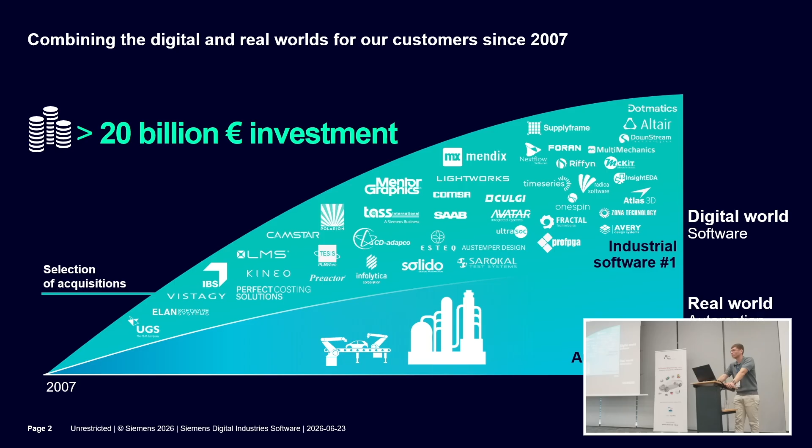This has been done through the Simcenter simulation portfolio, which enables us to transform engineering. We are as comprehensive as we can be, meaning we can access many different scenarios of multi-physics simulation and analysis, and the portfolio applies to all phases of product development.

We are as intelligent as we can be, meaning we are integrating AI into the simulation world. As Paschalis mentioned about AI agents and AI workflows, we're streamlining and automating complex workflows with the help of AI, scaling and evolving our resources, and integrating simulation and tests into the digital thread.

Here you can get a taste of where Altair's portfolio fits into the Simcenter portfolio after the integration, the acquisition, of course. These are the key areas we're going to talk about today, covering different multi-physics and different domain simulations.

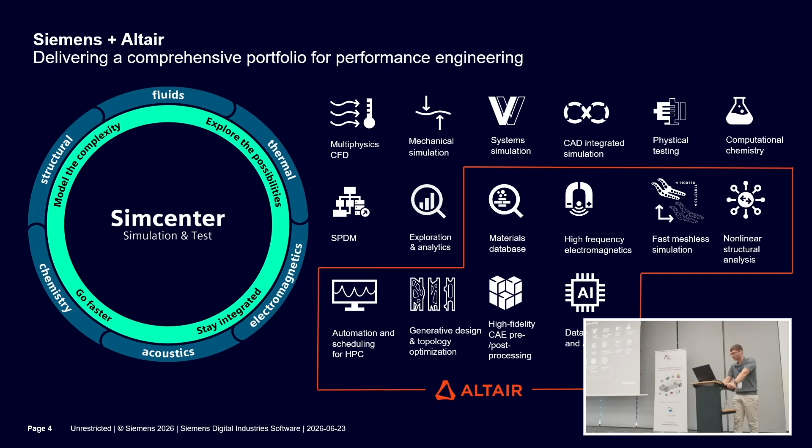Let's start with the simulation, modeling, and visualization software family. When we talk about simulation and visualization, we mean pre-processing our models, importing our CAD, pre-processing, setting up, creating the mesh, setting up our solvers, and afterward, once the solver has run, visualizing our results.

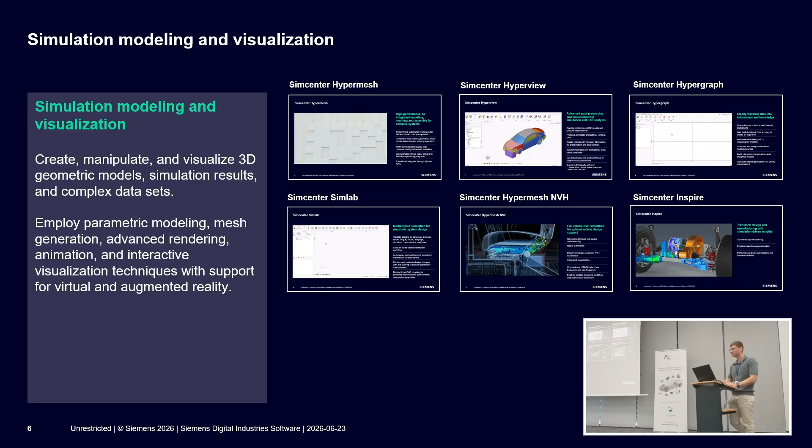Let's see the flagship of Altair, Simcenter HyperMesh. Let me ask a quick question - how many of you know HyperMesh? Can you please raise your hand? Okay. And how many of you have used HyperMesh? Okay, that's nice, thank you.

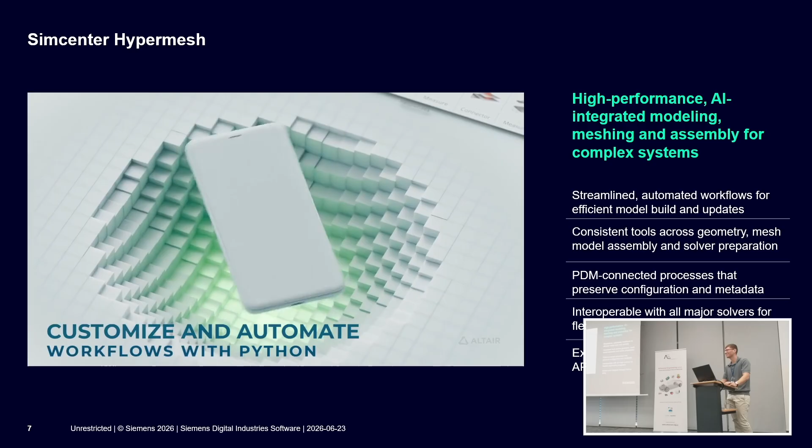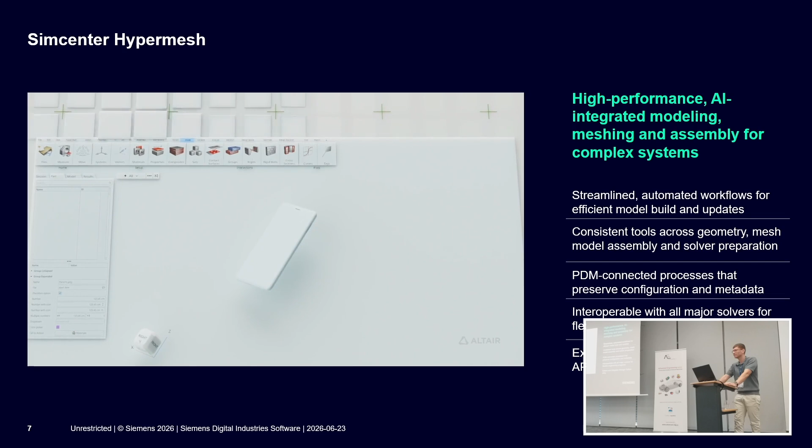Simcenter HyperMesh has been the flagship of Altair, and now Siemens, for more than 30 years. It's the go-to tool when it comes to pre-processing our structural analysis.

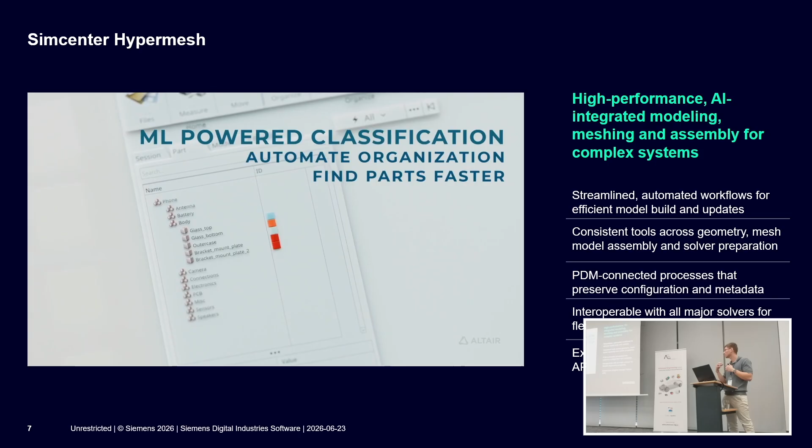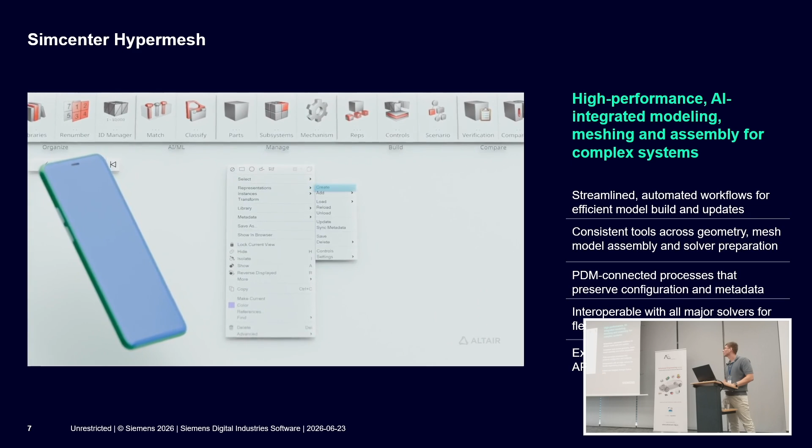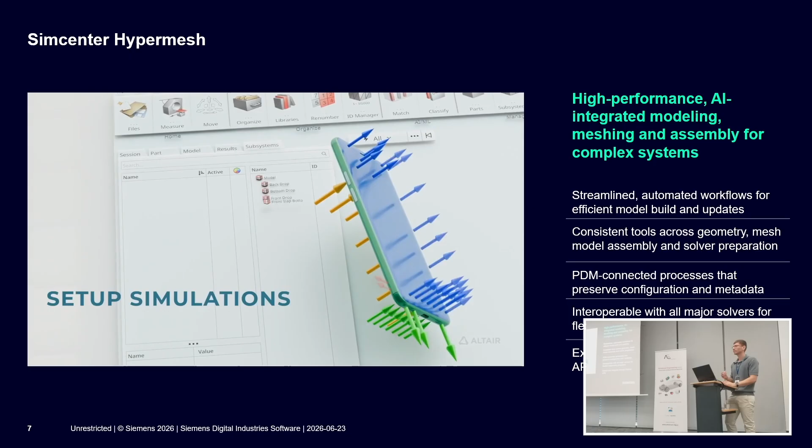It has great capabilities when it comes to importing our CAD. There are PDM-connected workflows that enable us to get metadata information and transform and utilize it in our engineering workflows. There are consistent tools across geometry modification, simplification, and mesh creation. HyperMesh can import different kinds of CAD formats, and within it we can set up our analysis for different solvers, like Abaqus, Nastran, and so on.

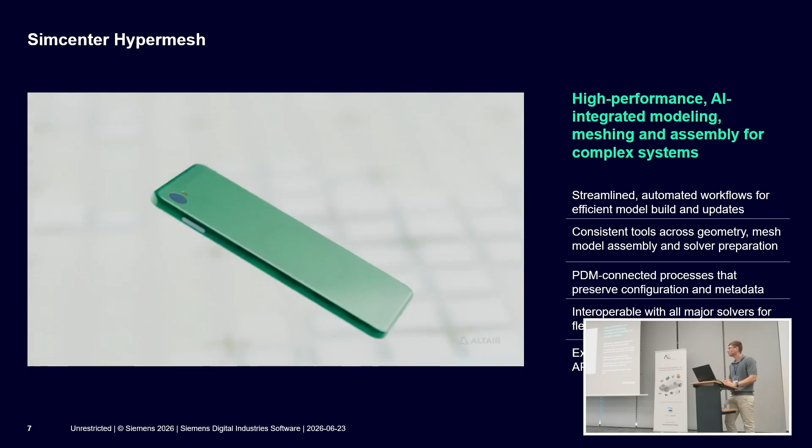So Simcenter HyperMesh is interoperable, and it has great capabilities when it comes to programming. It is open and can work through Python APIs that help us automate our workflows.

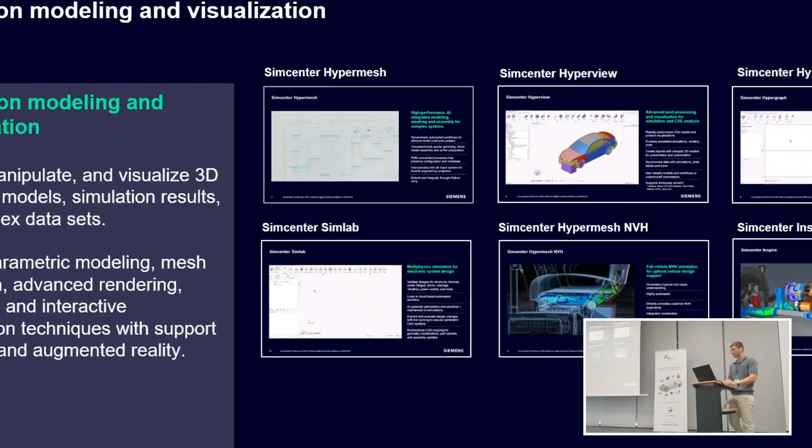Now moving on to Simcenter HyperView. HyperView is a great software when it comes to visualizing and animating our results. Inside HyperView, we can import different kinds of solver formats and CAE domains and disciplines, so we can visualize results from a CFD case, a structural case, and so on.

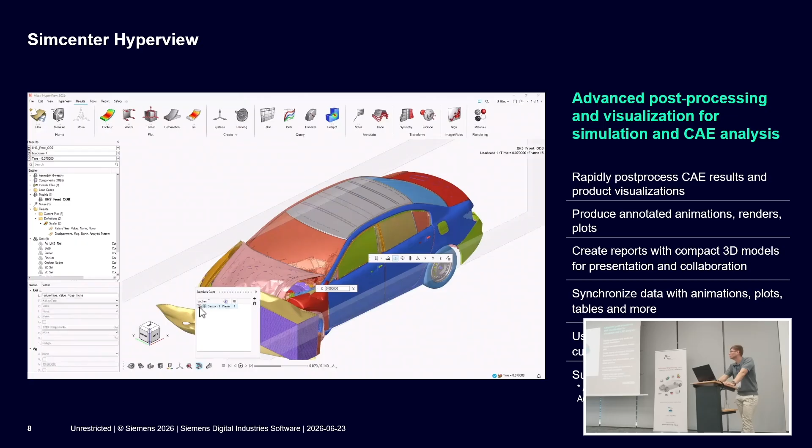Again, it can work through Python APIs, meaning we can accelerate our workflows. And it has advanced capabilities when it comes to visualizing our results - we can synchronize data with animations and plots, and create advanced reports through Simcenter HyperView.

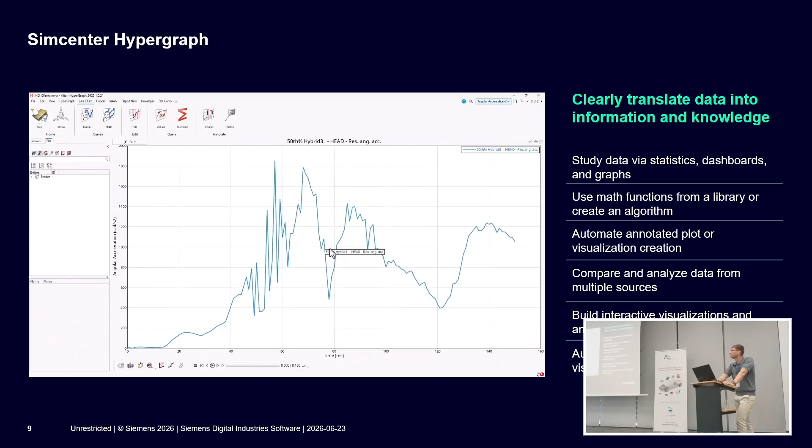Now let's move on to Simcenter HyperGraph, which again is a post-processing visualization software, but in this case it helps us create plots and advanced graphs. Simcenter HyperGraph has advanced capabilities when it comes to visualizing plots, with advanced mathematical functions that let us transform our graphs.

Of course, we can compare and analyze data from multiple sources. And again, like HyperMesh and HyperView, it can work through Python APIs, meaning it can make our life easier and boost our engineering workflows.

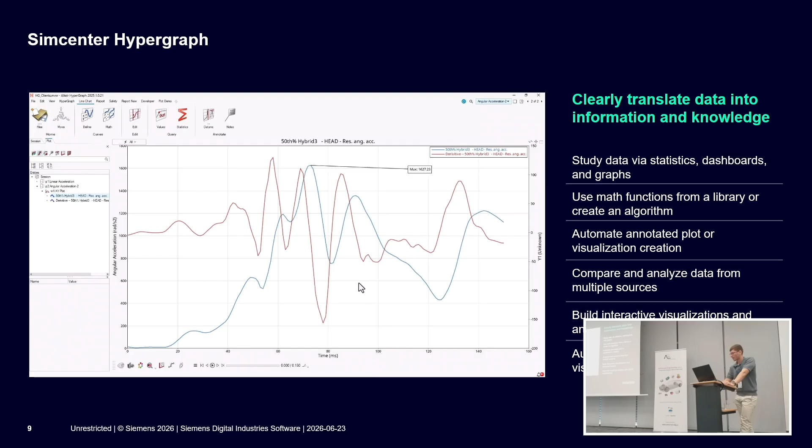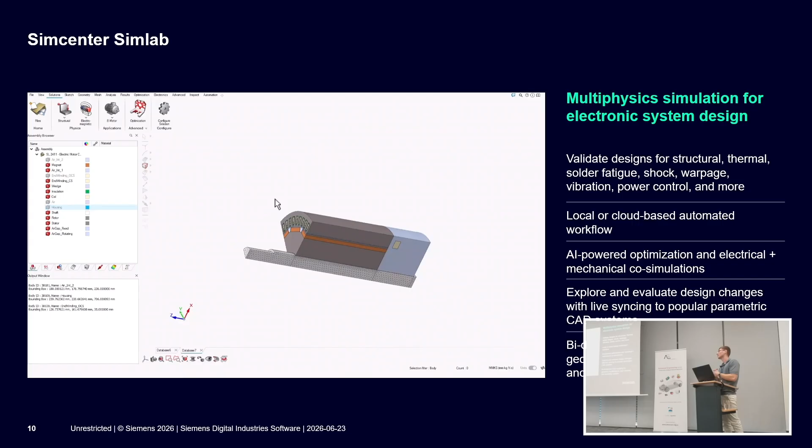Now about Simcenter SimLab, which is the tool when it comes to setting up, pre-processing our multi-physics analysis. So through SimLab, we can run simulations, we can set up simulations when it comes to structural, dynamics, thermal, solder fatigue, and also electromagnetics now. And it has advanced capabilities when it comes to AI-powered optimization.

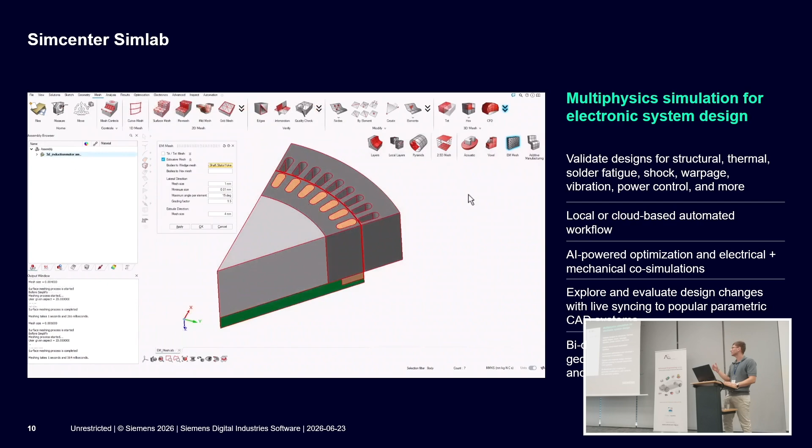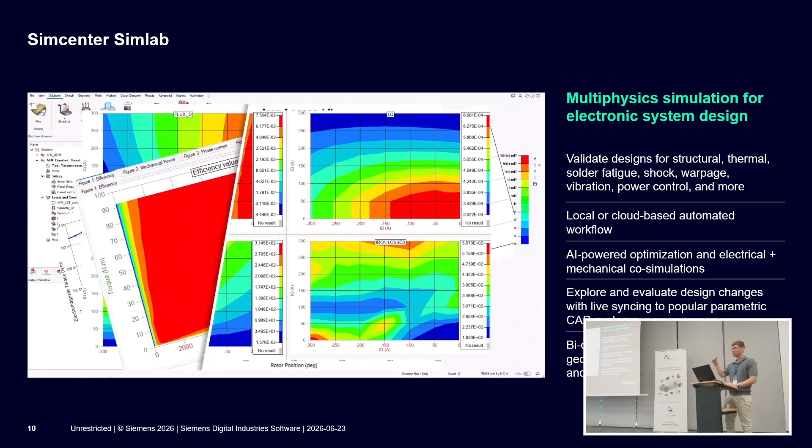And of course, we can set up electrical and mechanical co-simulation scenarios. And once again, it has great capabilities when it comes to bidirectional CAD coupling for geometry modifications. And also through SimLab, we can run DOEs, we can run optimizations, and in this way, we are able to find our optimal designs.

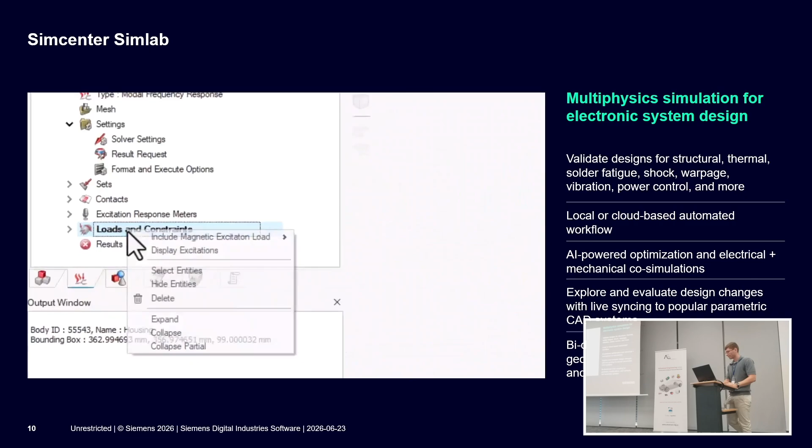Now with Simcenter HyperMesh NVH, which basically is the software responsible for the noise, vibration, and harshness analysis. So through it, we are able to, through quick what-if studies, to find our sensitive parameters. And also, we are able to bring closer to correlate our simulations with our tests, meaning we are able to minimize our experimental tests and also our prototypes. And it is an end-to-end solution, meaning it has also integrated visualization tools.

And of course, can be used for many different subsystems of vehicles. So meaning we can use Simcenter HyperMesh NVH for the trim body, for the powertrain, for the suspension systems, and so on.

Also about Simcenter Inspire, which is the simulation-driven design for manufacturing software, meaning we can run design explorations based on our physics. By doing so, for these design explorations, we are setting our constraints to be manufacturing constraints. So in this way, we are able to find our optimal manufacturable designs, but also taking into account our physics.

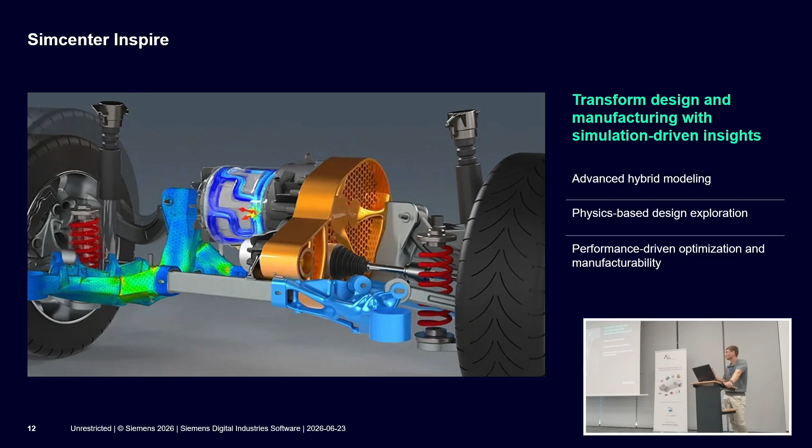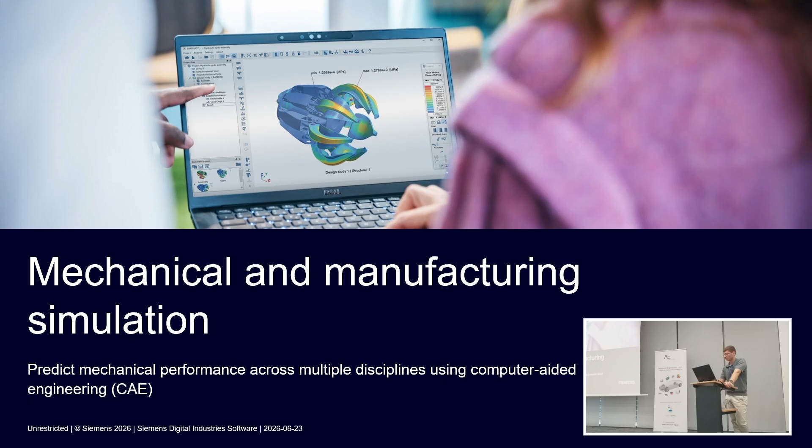So let's move on to the mechanical and manufacturing simulation software family. So we're going to divide this domain into 3 different domains. So the structures, meaning the structural side, when solving the structural analysis. The second one, the mechanisms, when it has to do with the multi-body dynamics simulations. And last but not least, for the manufacturing part, manufacturing processes.

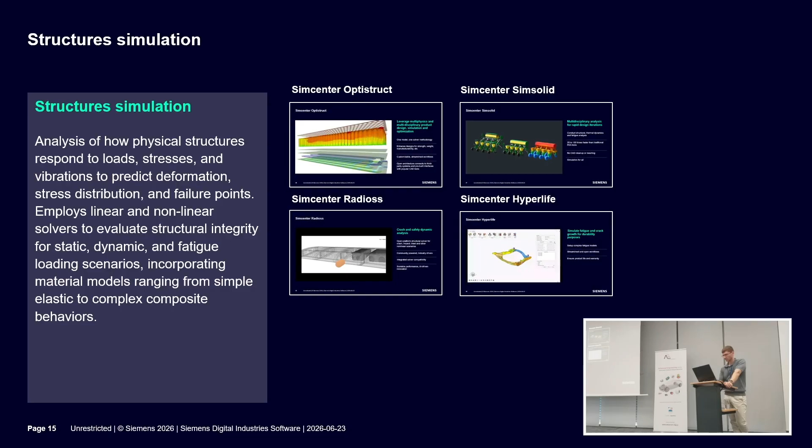So let's start with the structural simulations, meaning our detailed CAE analysis. So here, the first tool that we're going to see is Simcenter OptiStruct. Simcenter OptiStruct is a multi-physics solver that utilizes the one model and one solver methodology.

So basically, in Simcenter OptiStruct, we can run explicit simulations, implicit simulations, non-linear, linear, and so on. Also, it has great capabilities when it comes to linking the implicit, explicit continuation.

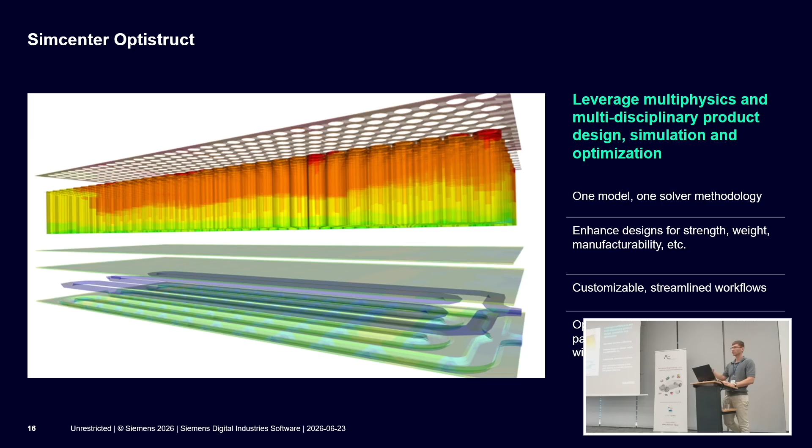Also, it has great capabilities when it comes to optimizing our components. So within OptiStruct, we can run topology optimization, topography optimization, free shape optimization, and many more different optimization methods. And it is open architecture, meaning it can be linked with other third-party solvers when it comes to co-simulation scenarios.

Now, another tool, very different from what we've seen so far, is Simcenter SimSolid. SimSolid is a meshless solution, meaning there's no need for geometry simplification and for meshing. We are able, with SimSolid, to run structural, thermal dynamics, and also fatigue analysis. So it is a multidisciplinary structural tool. And with SimSolid, we are able to have our results up to 100 times faster than traditional CAE tools.

And it's a simulation for all software, meaning even non-CAE experts, for example designers, can also utilize SimSolid in order to get really, really fast the results that they want after a design modification, for example.

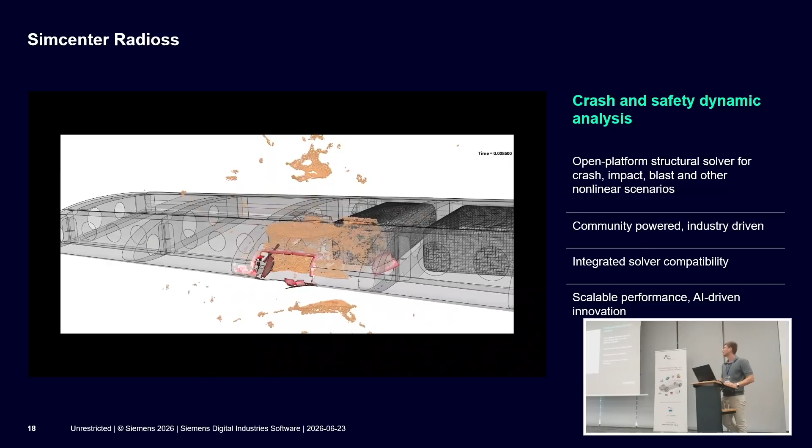Now, Simcenter Radioss. So you can see in the video some use cases that we can run with the solver of Radioss. So Simcenter Radioss is an industry-proven solver responsible for explicit dynamic scenarios. So with Simcenter Radioss, we can run impact simulations, crash analysis, blast, and other types of explicit dynamic simulations.

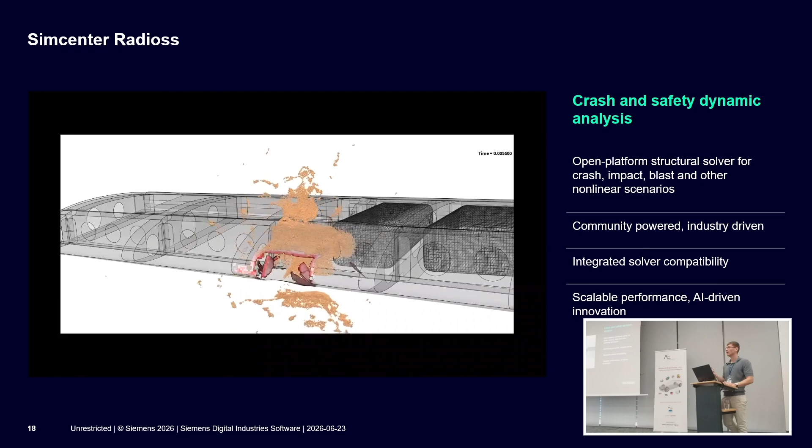It has unique solver compatibility with third-party solvers, meaning we can run directly external solver decks into Radioss. For example, we can run directly LS-DYNA solver decks. And with the help of Simcenter Radioss, of course, we can run many simulations. We can create, with these results, a dataset that we can afterwards train our AI models for fast physics predictions.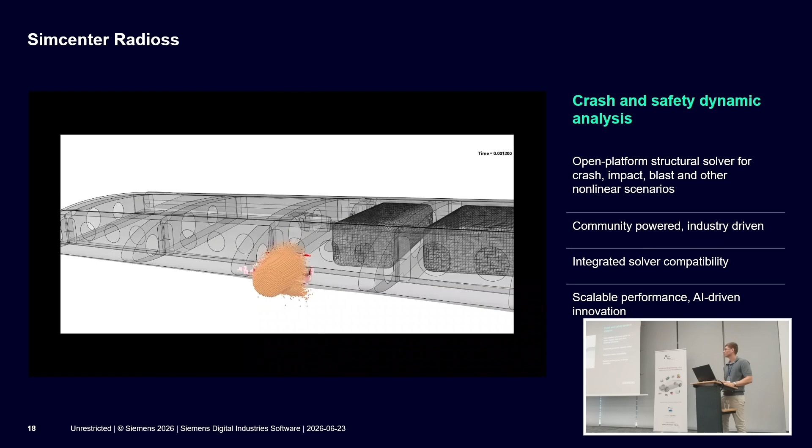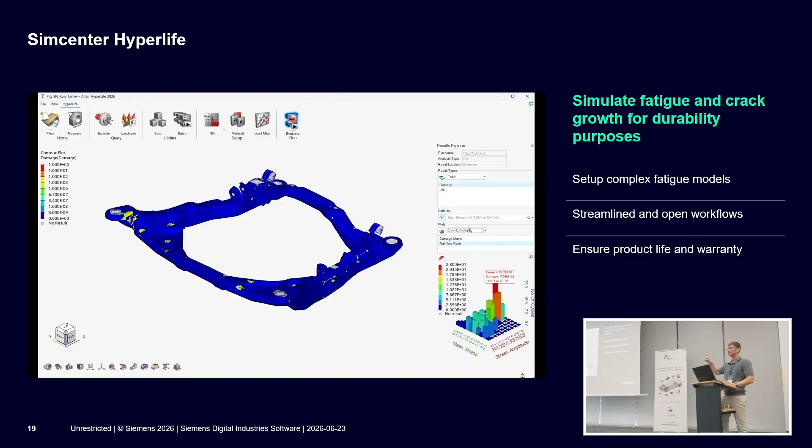Now, Simcenter Hyperlife is the tool, the software that enables us to simulate fatigue and crack growth for durability purposes. Within Hyperlife, we can set up complex fatigue models, and it is an open architecture software, meaning we can simulate the fatigue and the life using data from different CAE software. Also, with Simcenter Hyperlife, we can simulate the life and fatigue of spot welds and seam welds, ensuring our product's life and warranty with its high fidelity results.

Now moving on to the multi-body simulation side. When we're talking about multi-body simulations, as you already know, we're talking about large mechanical assemblies with high velocities, for example, or large rotational velocities, and so on.

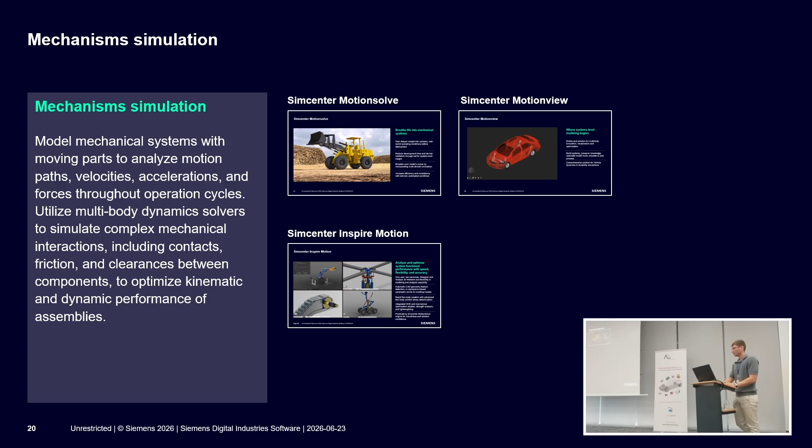So let's start with Simcenter MotionSolve. MotionSolve acts as a solver for our multi-body simulations, and it enables us, as the motto says, to breathe life into our mechanical systems, our assemblies. It helps us simulate and get deeper insight into our complex mechanical assemblies before doing prototypes and testing. Also, with MotionSolve, we are able to extract load time histories for each component separately to have them for detailed CAE analysis afterwards.

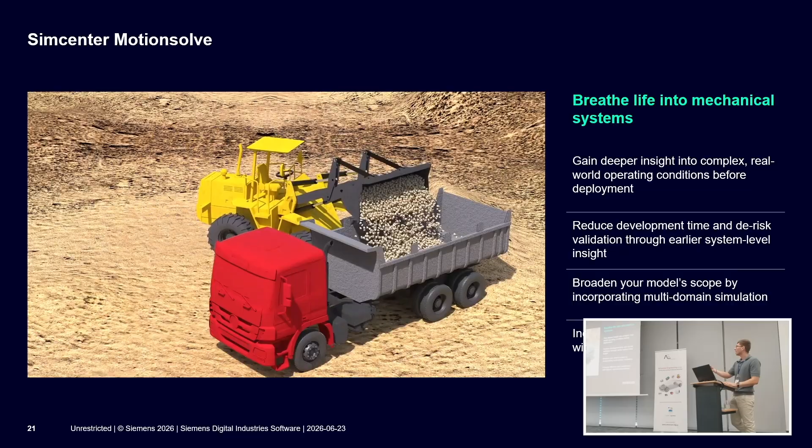And once again, like HyperMesh, HyperView, HyperGraph, it can be utilized through Python APIs, and it is an open architecture software, meaning it can link and run alongside different third-party solvers in co-simulation scenarios or via subroutines.

So now Simcenter MotionView. MotionView acts as the preprocessor for our multi-body dynamic systems. Through MotionView, we are able to simulate our mechanical systems, and we are able to build and store our mechanical systems and events into our libraries with variants, and in this way reduce the repetitive work.

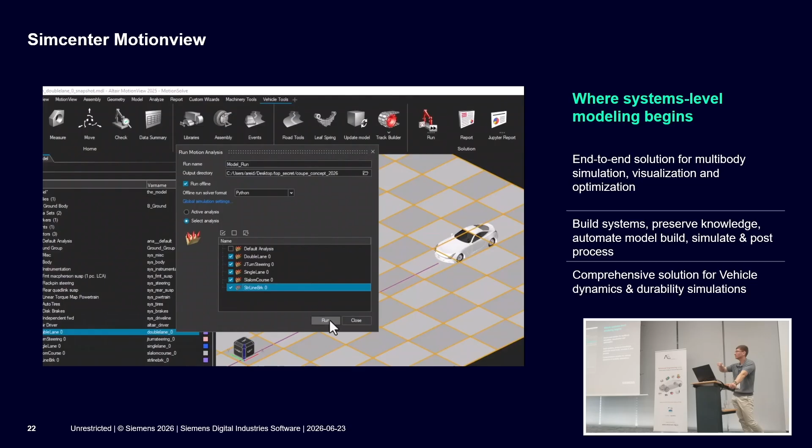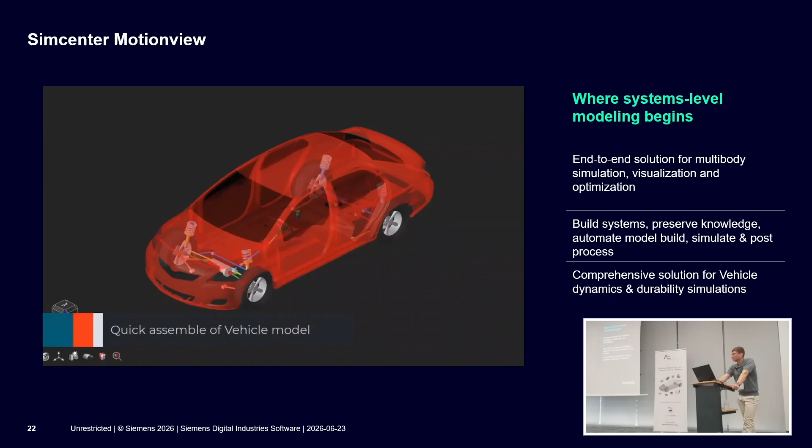Also, it comes with the vehicles tools extension, meaning that inside this library there are lots of different simulation scenarios for durability and dynamic simulations for ground vehicles. With this vehicles tools extension, we are able to simulate different subsystems of our vehicles, for example the suspension system, the steering wheel system, and so on. It also supports many popular pre-calibrated tire models.

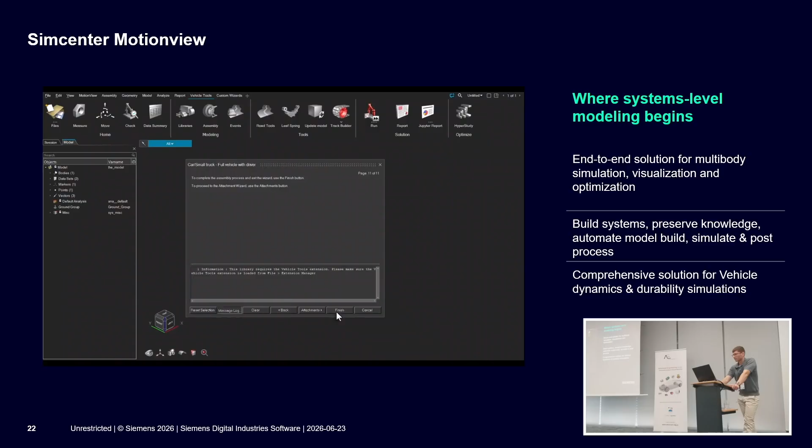We can rapidly create flex bodies within our simulation, and of course we can run DOEs and optimization studies to optimize our mechanical systems. Since it acts as a preprocessor, we are using MotionSolve once again to run and get our results.

Now, just an overview of the manufacturing solutions we offer under the umbrella of Inspire. When we're talking about manufacturing processes, we're talking about simulating the manufacturing, but why? In order to find defects or faults beforehand, before creating prototypes, and in this way optimize and improve our products. But also, by simulating the manufacturing processes, we are able to calculate the residual stresses within our components, and having these residual stresses as material properties in our detailed CAE simulations helps us get more accurate results in the end. So you can see the different tools, different software responsible for the manufacturing processes according to the manufacturing process that we're going to execute in the real world.

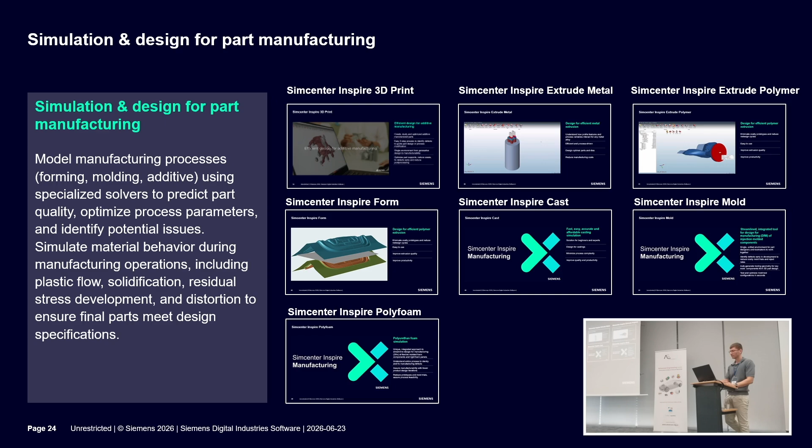Now continuing with the fluid simulation. When it comes to fluid simulation, we offer different kinds of software, of solutions. Let's start with Simcenter HyperMesh CFD, a unified CFD simulation for aerodynamics and aeroacoustics.

It is a single interface for geometry, meshing, post-processing, and reporting. It is 80% faster compared to other software. Also, with HyperMesh CFD, we get high-fidelity results that lie closely to our tests, and of course we can run DOE studies to explore our design spaces and help improve our designs, our products. It also has seamless integration with AI solutions, meaning through HyperMesh CFD we can create datasets for future AI model training in order to deploy physics AI models for faster results.

Now, Simcenter FlightStream. FlightStream is an advanced panel method, also combined with computational techniques for fast and reliable results. It gives us results across the subsonic and hypersonic domains. There's no volumetric meshing needed, so it's much faster compared to traditional CFD simulations. And it works seamlessly with NX, SolidWorks, ANSA, and Pointwise.

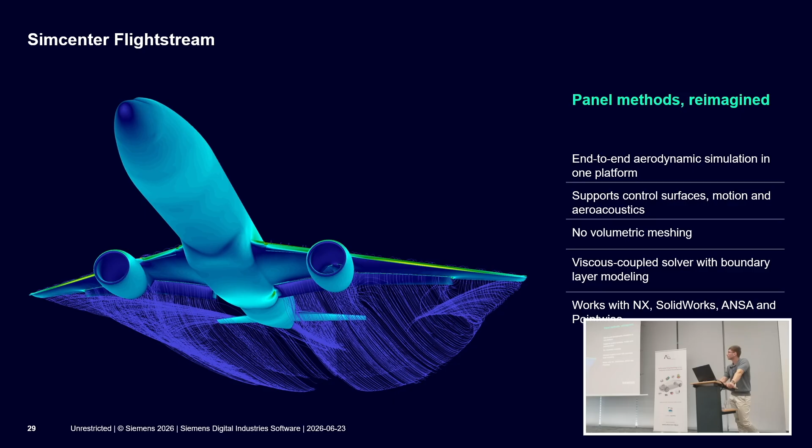Now moving on to the Simcenter UltraFluid, which is a high-fidelity CFD solver for aeroacoustics, but also in this case for transient aerodynamics. So UltraFluid enables us to eliminate greenhouse cabin noise issues for ground vehicles. And with its high fidelity results, it boosts aerodynamic performance, meaning we can optimize and improve our products.

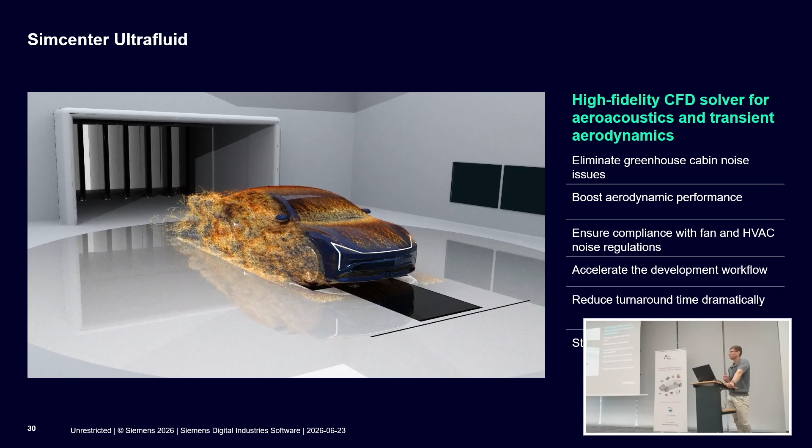Now with Simcenter Nanofluid, you can see here a very nice example of how Nanofluid can help us simulate the oil supply system inside the gearbox. It's a smoothed particle hydrodynamics solver, basically mesh-free, so it's easy also for non-experts to set up their simulations. It helps us simulate high-speed flows, liquid-air interaction, and high-speed flows when it comes to very complicated surfaces and very complicated domains.

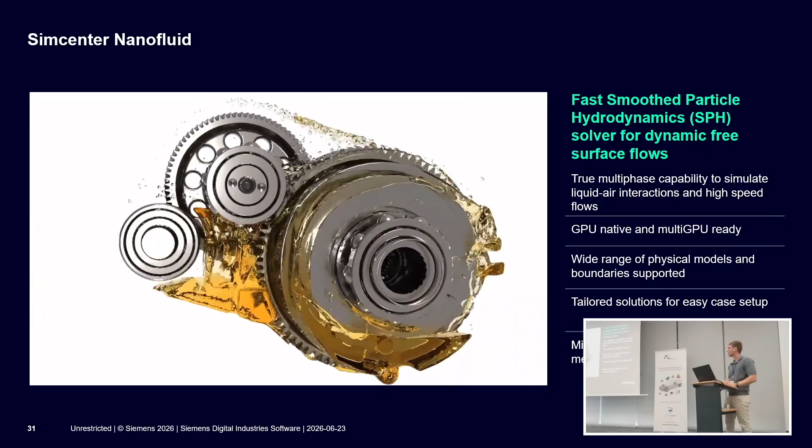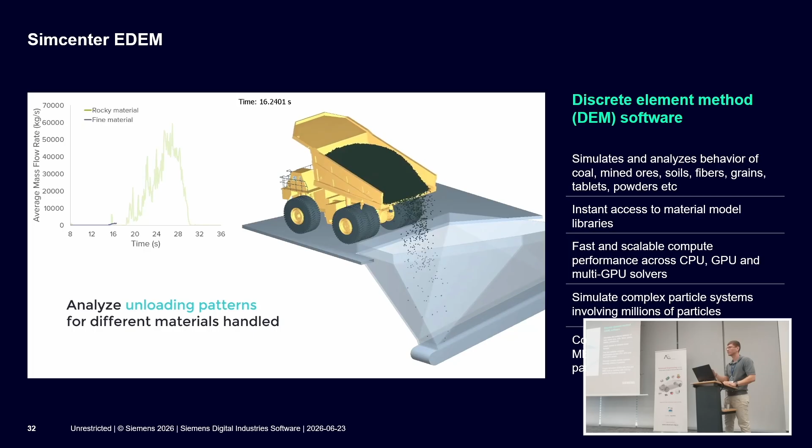And for the CFD part, the last solution is Simcenter EDEM, which utilizes the discrete element method. Through EDEM, we are able to simulate bulk and granular material. It has pre-calibrated materials, for example, for soil, coal, tablets, and so on. It is also multi-GPU enabled in order to get our results faster. We can simulate scenarios with millions of particles. And of course, its strength is when it comes to co-simulating with EDEM alongside, for example, multi-body dynamics tools like Motion Solve, and also other CFD software.

Now let's see the solutions that we've got inside the Simcenter simulation portfolio when it comes to creating and handling materials.

The first tool is Simcenter Material Modeler, which enables us to translate and transform raw experimental material data into simulation-ready-to-run material cards. It has advanced capabilities and automated workflows that help us create these material cards for multiple CAE domains and disciplines, and for multiple solver formats, meaning we can export these material cards to, for example, OptiStruct or Radioss and so on. It is integrated with Simcenter Material Data Center, which we're going to check afterwards, for secure data sharing across our company and across different teams.

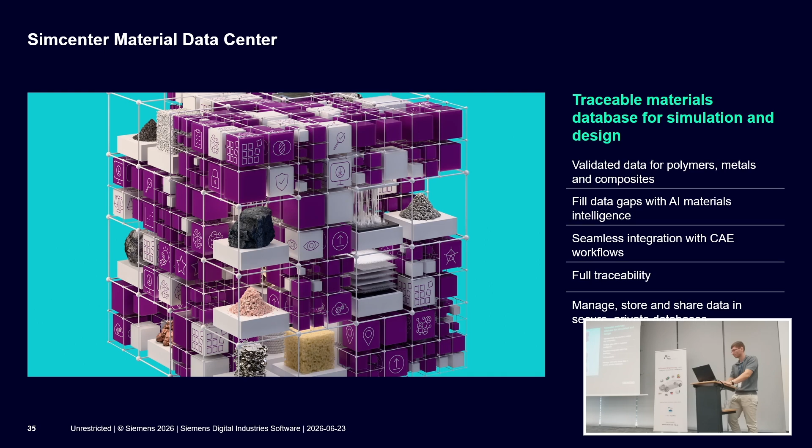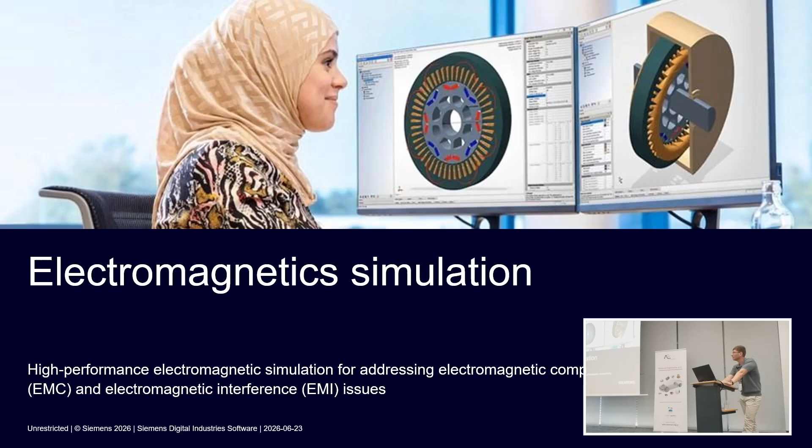Now moving on to electromagnetic simulation, meaning high frequency electromagnetics and low frequency electromagnetics. We've got three solutions here that we're going to see.

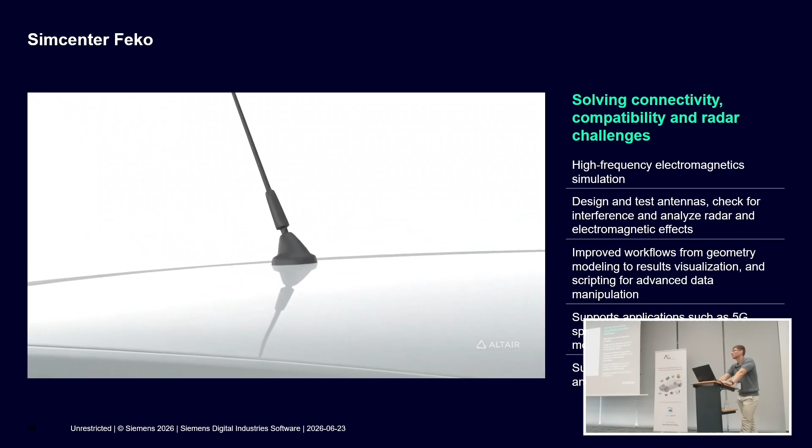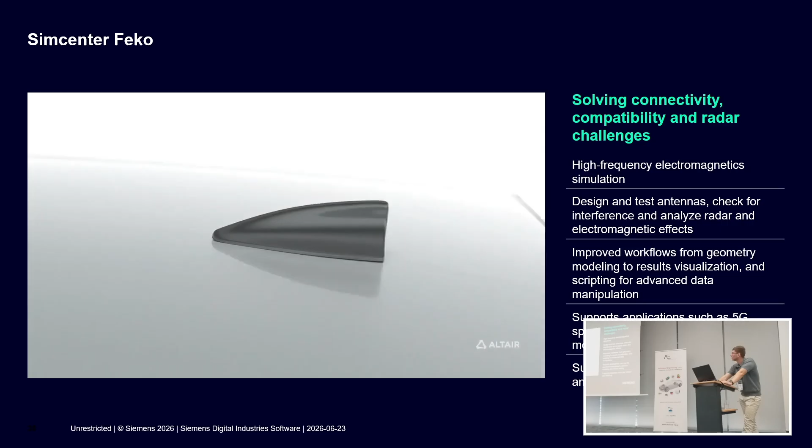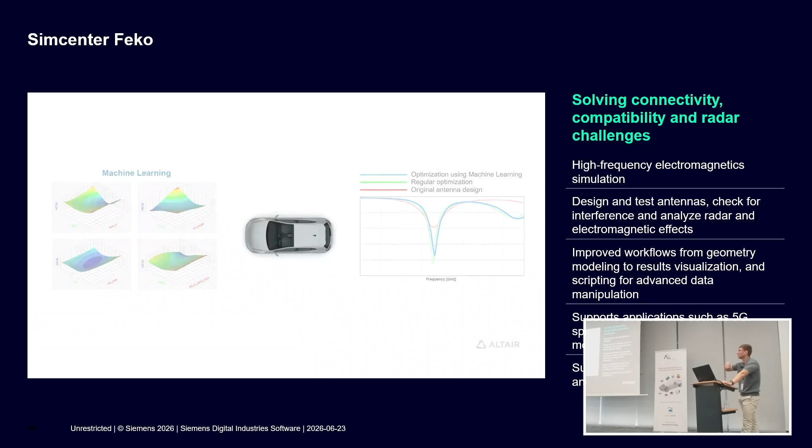Simcenter Feko is the leading software when it comes to high frequency electromagnetic simulation. Through Feko, we can design and test antenna positioning, as you can see in the video, or we can simulate radome modeling, meaning the radar and the dome. We can check for electromagnetic interference and analyze radar and electromagnetic effects. It is an end-to-end solution, meaning there are improved workflows that we can handle from geometry modeling up to result visualization and reporting. It also supports integrated tools like WinProp.

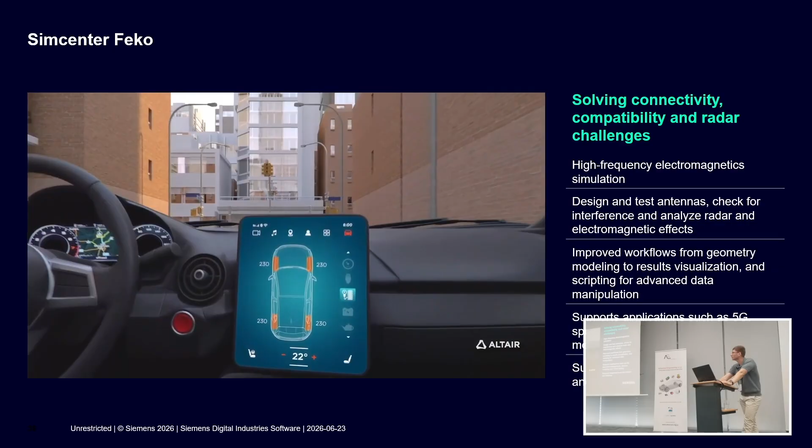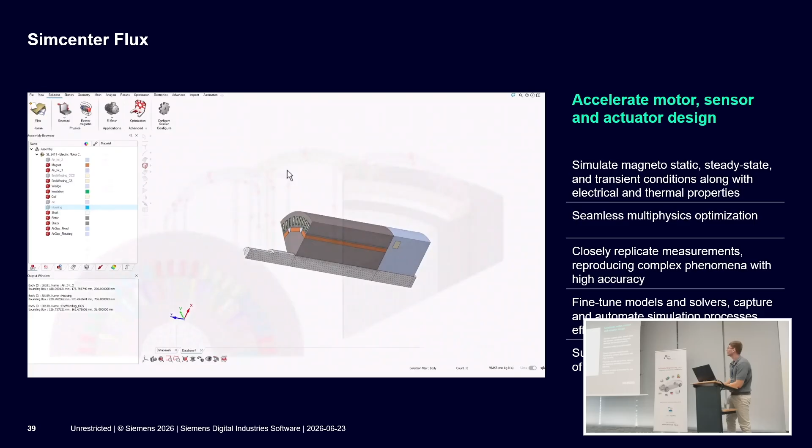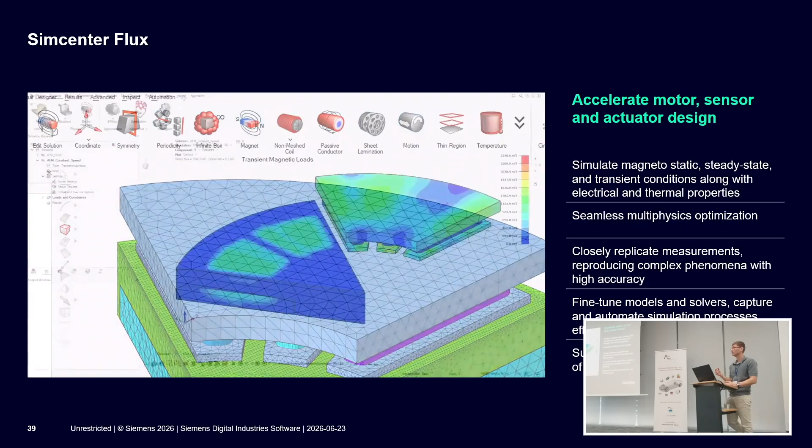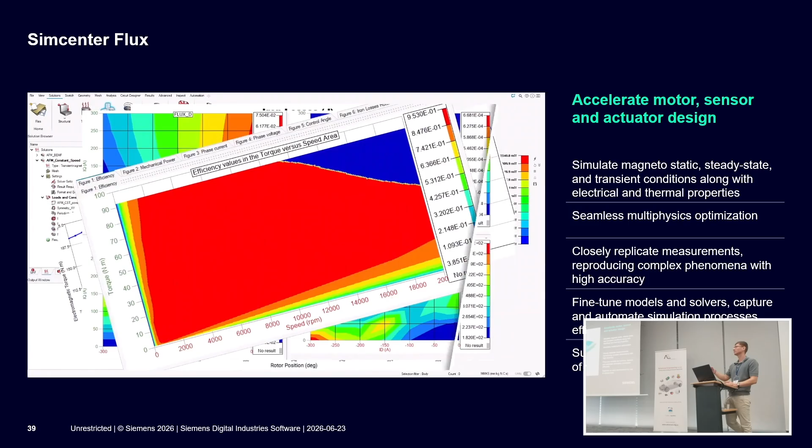Now moving on to low frequency electromagnetics and Simcenter Flux. Simcenter Flux helps us optimize our electromechanical equipment in order to improve our final products. We can simulate magnetostatic, steady state, or transient conditions along with thermal and electrical properties. There is also seamless multiphysics optimization with multiphysics constraints in order to optimize our products, and it provides high fidelity electromagnetics results to be closer to our tests for correlation purposes, relying more on simulation rather than creating prototypes and running multiple experimental tests.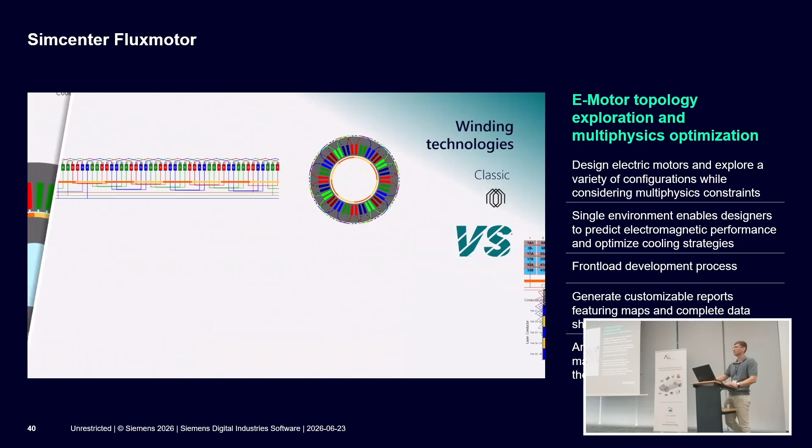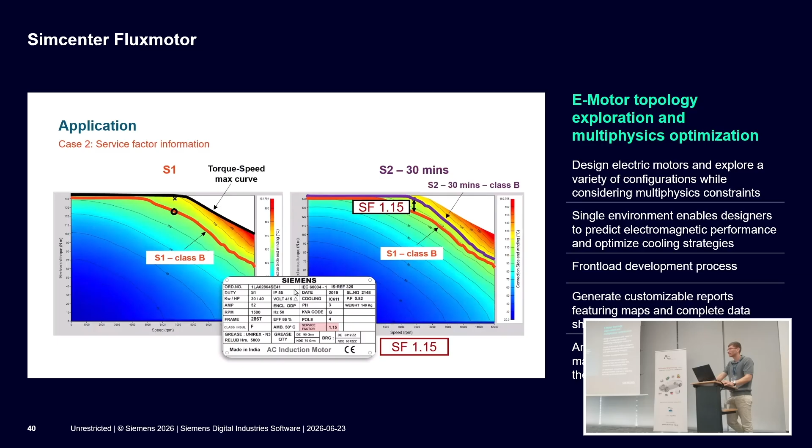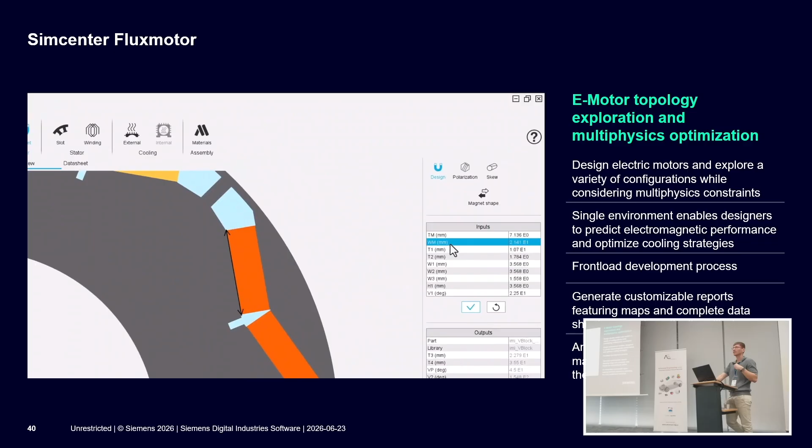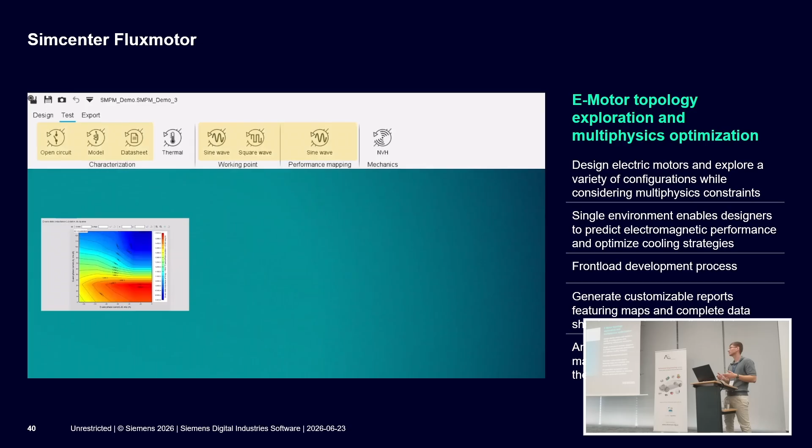Simcenter Fluxmotor is the tool, the software, when it comes to topology optimizing our electrical motors. It is dedicated to the design of our electric motors. With the workflows it provides, it's a go-to tool for improving the performance of our products. We can run optimizations, explore our design space of our electrical motors while considering multiphysics constraints. We can generate customizable reports to get insights from our results, which helps us improve our products.

Now we are moving on to the final part of this presentation, for engineering applications and engineering AI. On the second presentation we're going to get into more detail about the engineering AI part, but let's have an overview here of the products.

When we're talking about engineering AI, in this case we can split this section into two different sections: the multidisciplinary design analysis and optimization tools software family, and also the engineering data science software.

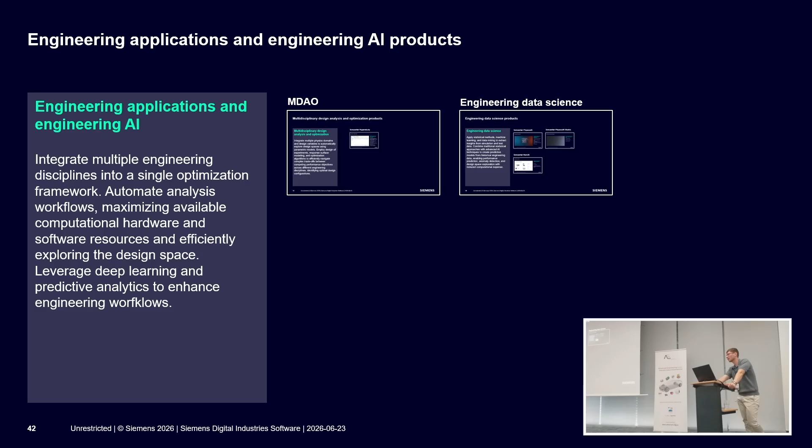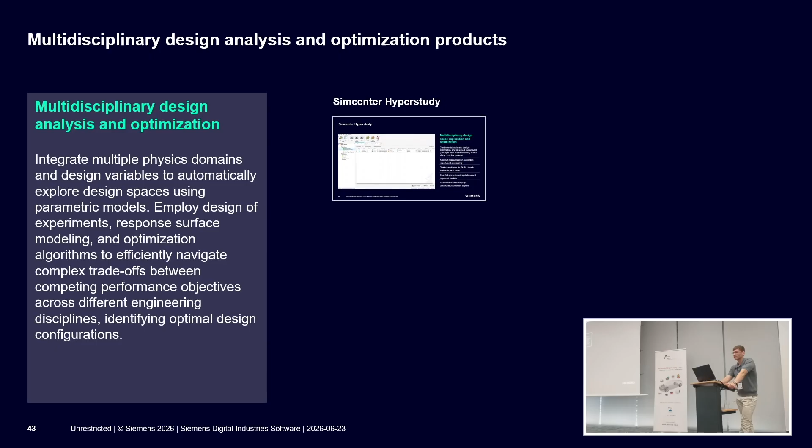For the multidisciplinary design analysis and optimization, let's see Simcenter Hyperstudy, which is a multidisciplinary design space exploration and optimization software. With Simcenter Hyperstudy, we are able very effectively to create data through DOEs and optimization studies to help our multidisciplinary teams study our complex systems. We can very easily create the data, run our optimization or DOEs, and very effectively post-process our results, meaning, for example, creating a Pareto front or post-processing the results in any way we desire.

It is integrated and can work basically with different kinds of solvers. It can call different solvers in order to run DOEs and optimizations. And also through Hyperstudy, we can deploy our predictive AI models, and share the models very effectively and very easily between our teams.

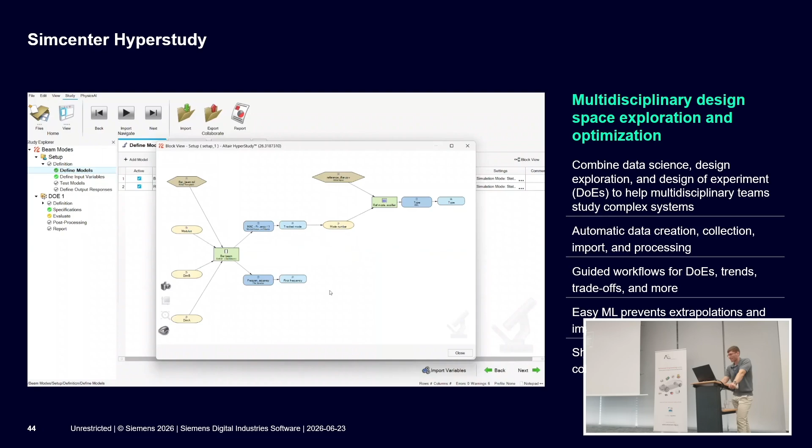Now for the engineering data science part, meaning utilizing deep learning methods to extract insights from past simulations and test data. We can feed this data to create predictive models that afterwards can help us accelerate our design exploration studies and get faster results with these predictive models. Of course, we can also reduce our computational resources when running these design exploration studies.

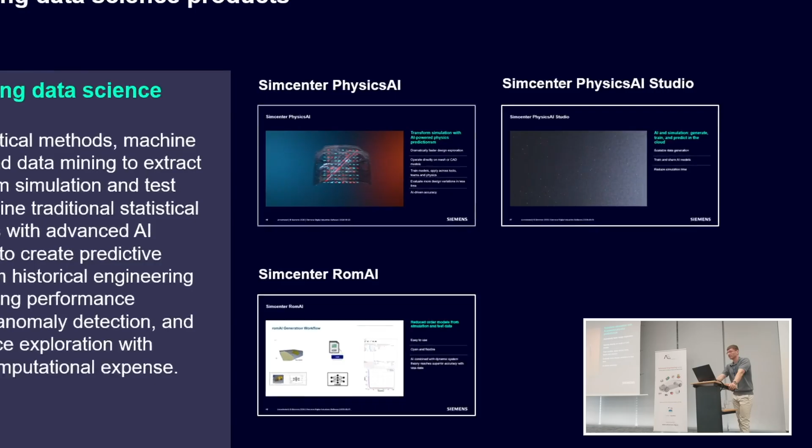The first tool here, the first software that we're going to see, is Simcenter Physics AI. Physics AI is a geometric deep learning engine that isn't limited to parametric studies, meaning we can utilize past historical simulations that aren't parameterized, where the geometry, boundary conditions, or forces aren't parameterized. We can also, of course, use test data.

We can train Physics AI on this data, and after the training has finished and is successful, and we are satisfied with the results, we can deploy this predictive model in order to replace the traditional FE simulations. In this way, we can reduce the time needed to get our results, and we are able to evaluate more design variations in less time.

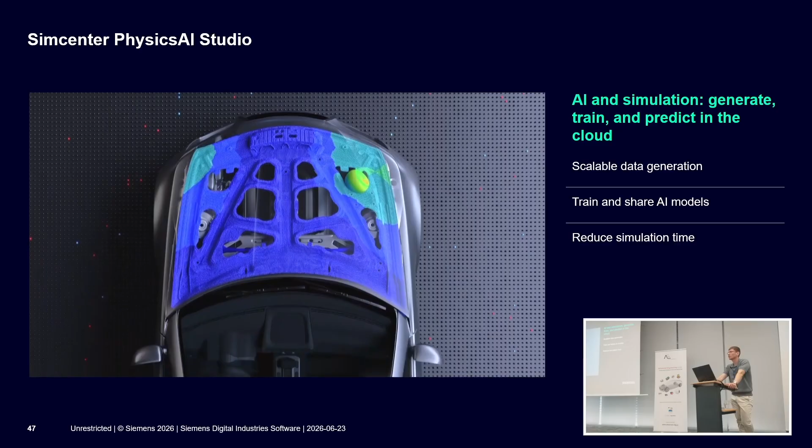Now, Physics AI Studio broadens the value that Physics AI brings. Physics AI Studio is basically an enterprise cloud-based solution that enables all the teams across the company to create the data very effectively, to train the AI models, and to share them across the company in order to deploy them in a web-based platform for fast physics predictions.

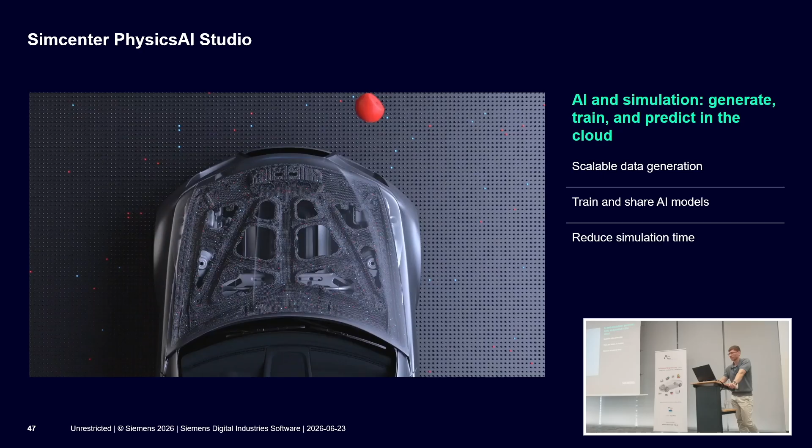Last but not least, the software here that we're going to talk about is Simcenter ROM AI. ROM AI is a reduced order modeling technique which uses either simulation data or test data, but this data is organized into a CSV file and needs to be parameterized. With ROM AI, it's basically a deep learning method that also combines dynamic system theory for dynamic systems, and we train it, as you can see here.

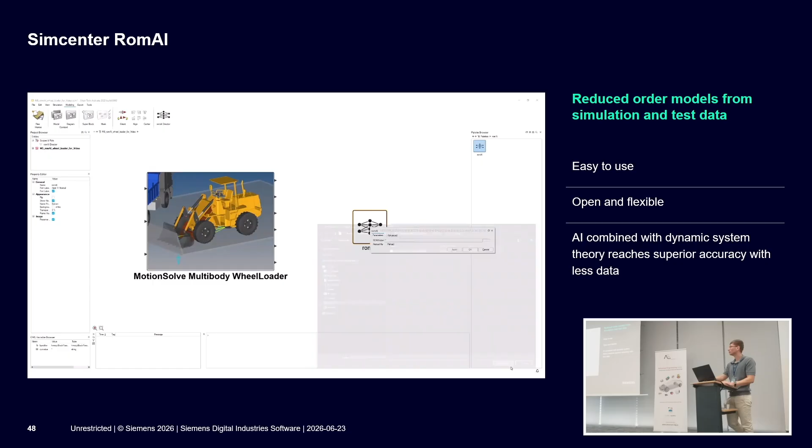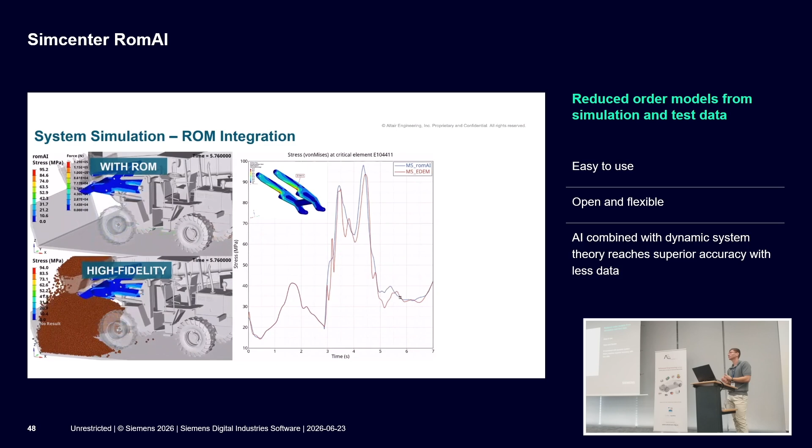We are able to deploy these ROM AI models in order to get faster predictions, and it can find use in many different applications. For example, we can replace a traditional solver, or we can export this ROM AI model into functional mockup units, FMUs, in order to get them installed on hardware, or it can be used as a virtual sensor in the real world. So it can find many different applications.

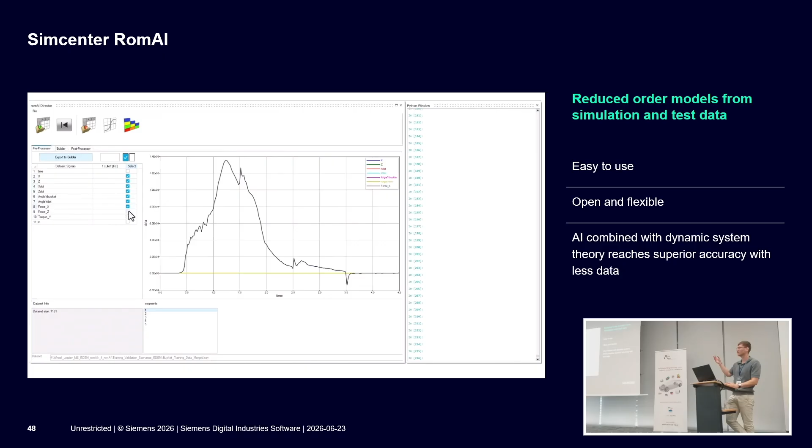Basically, that's it by my side for now. I'm open to any questions that you have in your mind. Once again, thank you very much for having me here today. Thank you.

Yeah, of course. You can ask me anything also on the breaks, or if you have something in your mind now, you can feel free to ask, basically. Okay, I guess there's no question.